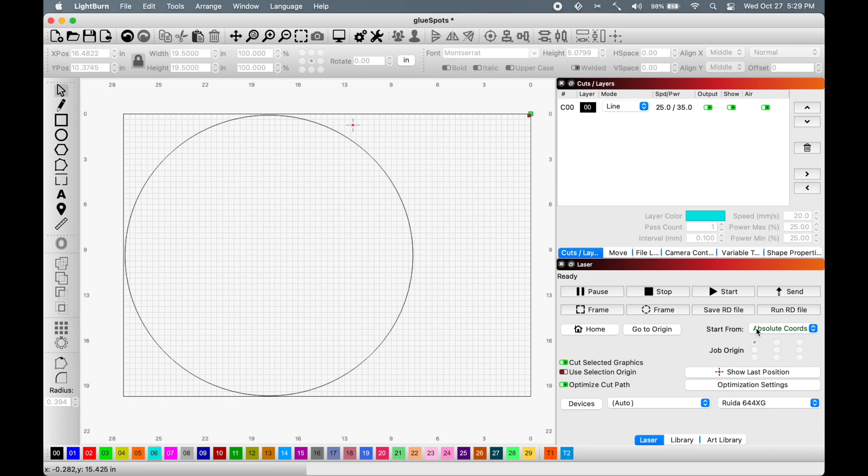Second, do not move your material after you cut it. If you need to check and find out if something is cut all the way through, be very careful checking that you're not moving it around. If you do move it, you're likely going to have to realign it one way or another, and that's not going to be very easy.

Okay, so I've just made this cut, and I found a small knot that didn't cut. So first I'm going to need to find this position in Lightburn.

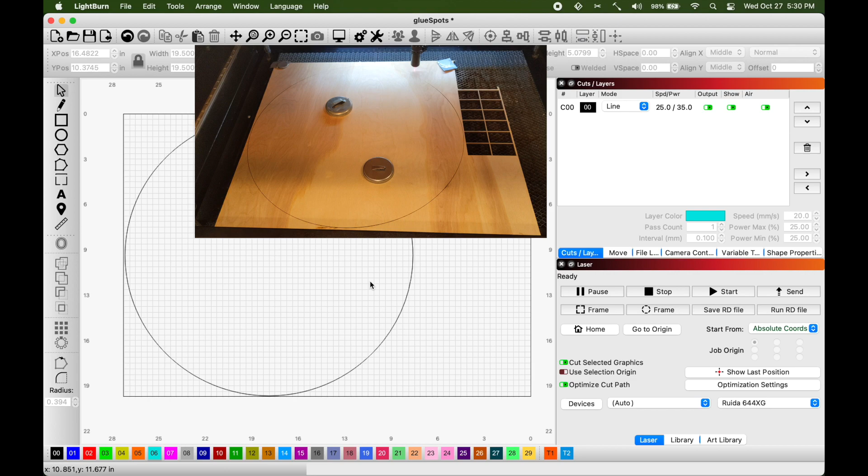So there's a couple of ways to do that. One way is to use the jog arrows on my laser machine. Just move the head over to that position. And then right here in Lightburn, in the move panel, I'm just going to click the get position button, and that is going to show me where the laser head is located. And that right now is just about the center of my glue spot.

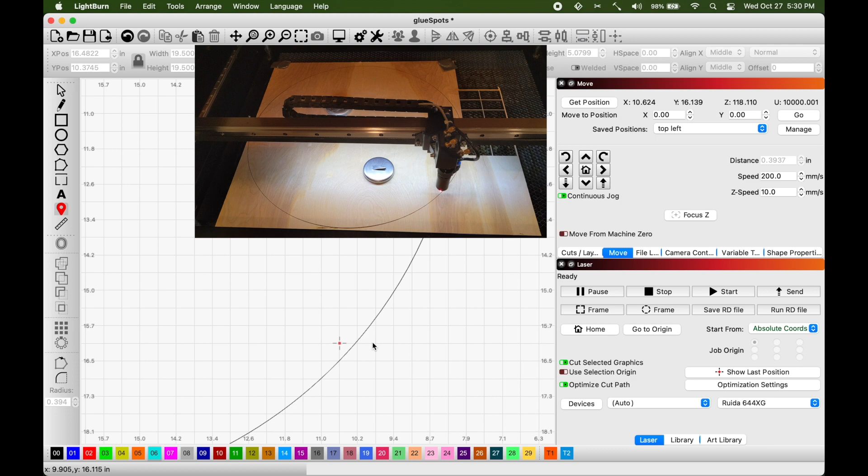Another way that you can do that is to click this position tool right here in the Lightburn toolbar and click around using it and move your laser head to get in the right position. So I'm going to stick it right there, and I can see that that is over. It's a little hard to see on camera, but that's over the position that I need it to be. So now I've got the camera moved a little closer, and I found the right spot that I want to recut.

Next I'm going to draw a cutout shape around it. So a rectangle or a circle works fine, and I'm just going to draw this shape around the area, and then I can frame it to see how big of an area it covers. That looks pretty good.

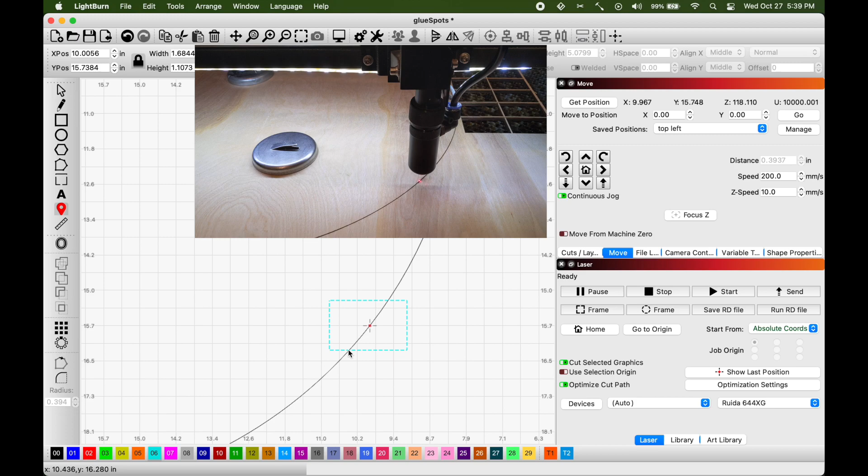I can also use this position tool again and just click. This is where my cut would start. This is where it would end. And I'm happy with that size.

So next I'm going to cut my design down to just this section inside the rectangle. To do that, I'm going to hit escape to go from the rectangle tool back to the selection tool, or I can also just click up here on the cursor. Then I'm going to select my design shape first. The order matters here. And then I'm going to hold Shift and click on my cutout shape.

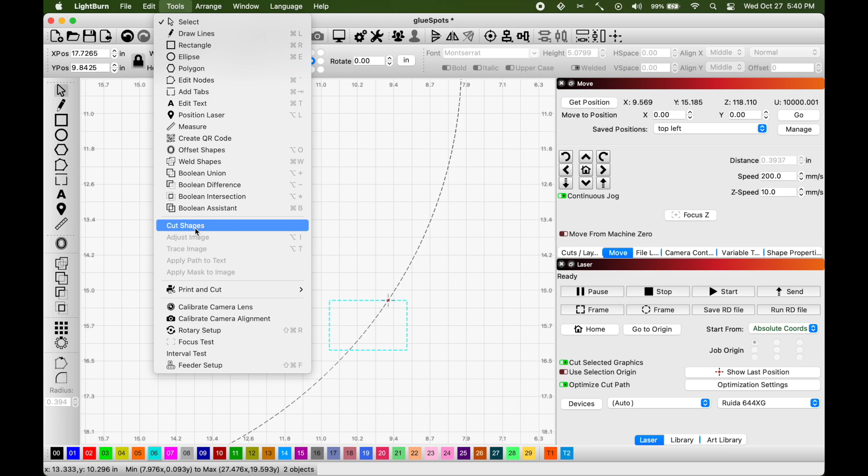Once I've selected those in that order, I can come up here to Tools and select Cut Shapes. With Cut Shapes clicked, the rectangle is going to disappear, and you can see now that my circle has been broken into two pieces.

Now notice that I've got Cut Selected Graphics selected here. Without that selected, the Frame button is going to frame everything. I don't want to do that. Cut Selected Graphics will cause it to frame just what's about to be cut. And if I hit the frame, I can see it's just going to cut my little piece of the curve right there.

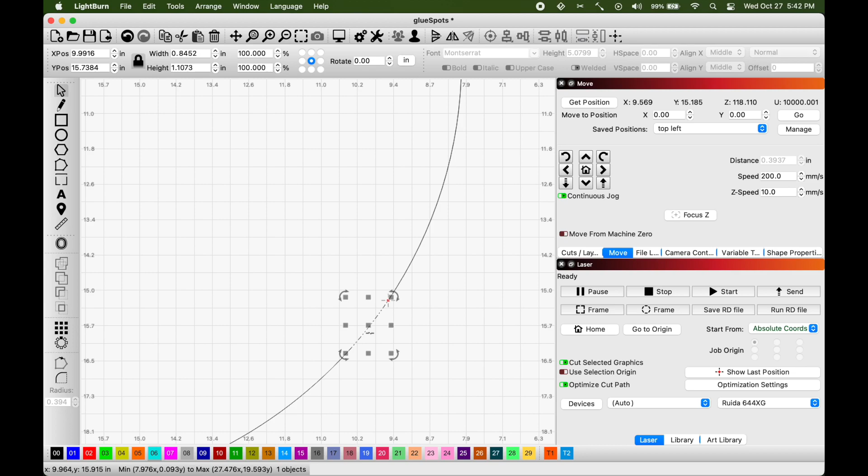Now, side note, if the new cutout shape that you get is bigger than what you had drawn with the rectangle, in other words, if this shape doesn't match the rectangle that you had drawn before, watch the end of the video. There's currently a Lightburn bug that is about to be fixed shortly, and I'll show you a workaround for it if you run into that bug. But by the next version of Lightburn, the bug's already going to be gone, so I'm just going to leave that for the very end of the video.

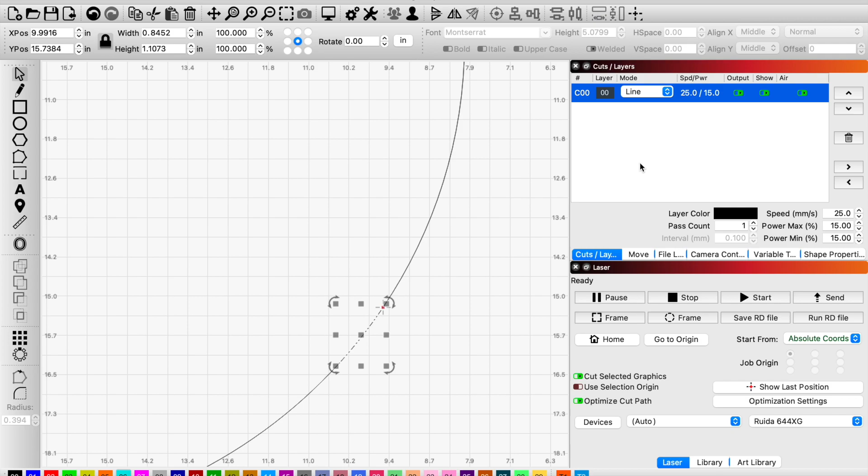So now that I've trimmed my design to just the piece that I want cut, I'm ready to cut. I'm going to double check my cut settings, make sure they're what I want to use. Because it's so easy to just cut and recut, I can drop the power if I want to and run it multiple times. Also, when my cut starts and ends, it's going to go back to the origin, so I can hit the origin button on my machine and tell it where I want it to go back to when the cut is finished. That'll save me some time if I'm cutting the same little segment multiple times. So I've double checked my settings, double checked my focus, and I'm gonna fire up the laser and make the cut.

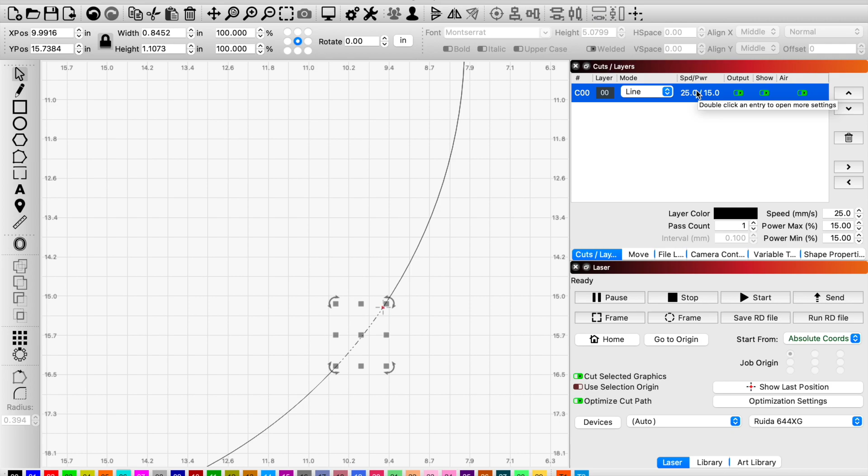Okay, you can see it only took a second. I did see some cutting going on in the middle there. I'm gonna run it one more time and take a look at it.

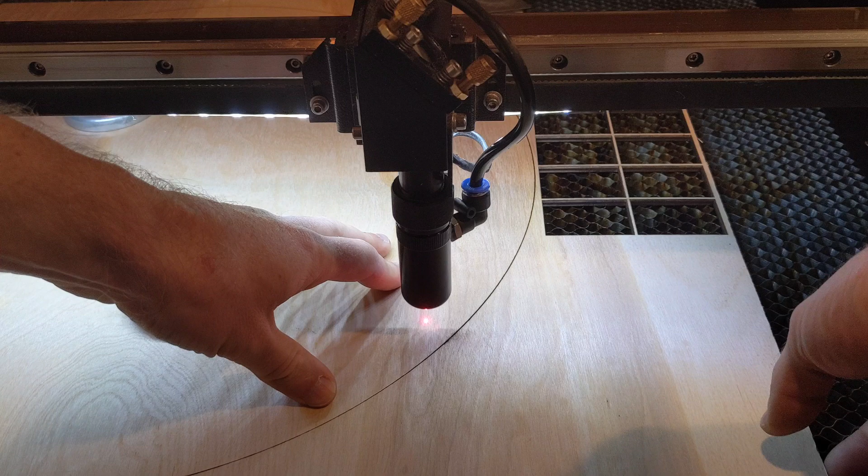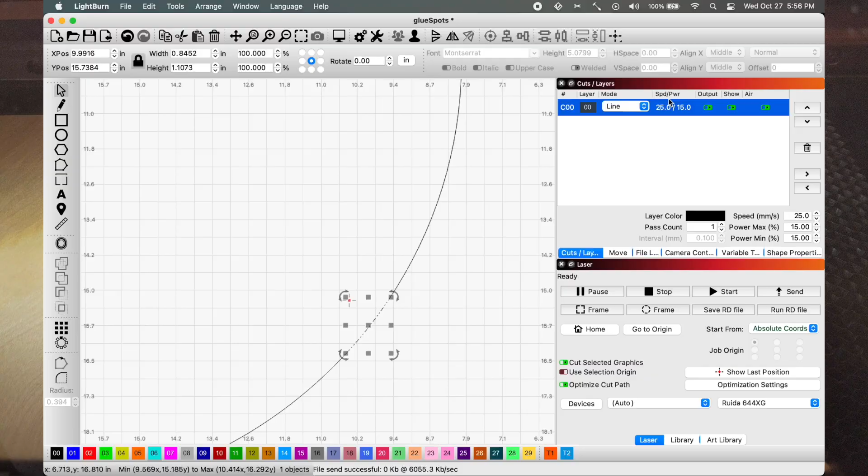When I check this, I still want to be careful not to move it in case it's not cut all the way through just yet. It feels like it's still not ready yet, still not quite cut through. I'm going to change my settings back to my regular cut settings for this material and run the cut one more time.

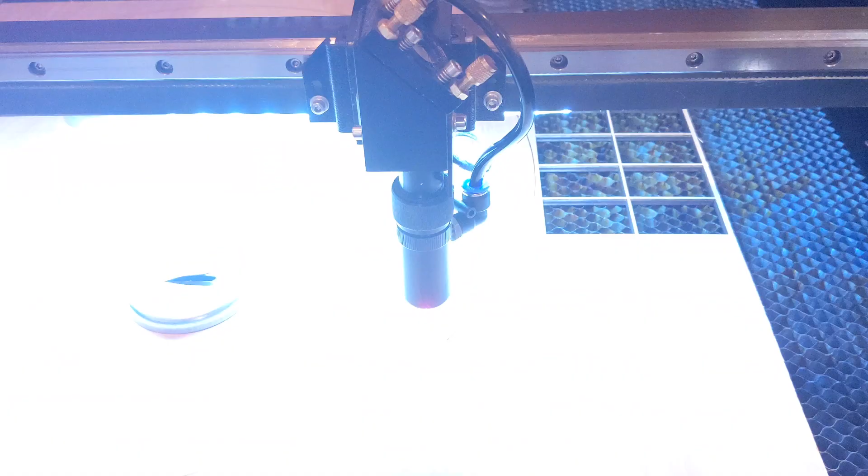Check it again. Now sometimes these knots and glue spots can be pretty stubborn, so you can imagine I've run this multiple times now. Think how much time I'm saving each time I run this. Doesn't hurt anything, and you saw it drop there just now, so now I know that it's really finished cutting. At this point, I just want to make sure I've finished cutting through everything. If I had more glue spots, I might take care of those, but since this was only just the one glue spot, I'm just going to check and make sure everything is loose. Now that I see that it is, I'm going to pull my backer piece off.

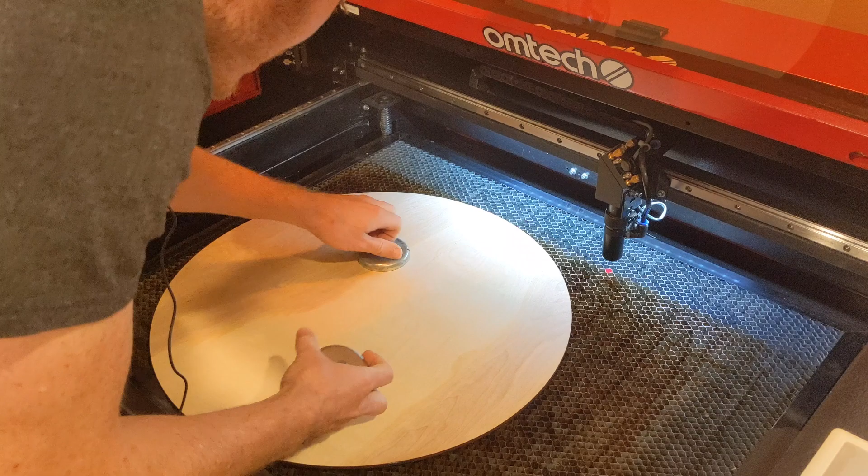Sometimes I have the backer held down with magnets. In this case, I just held down the middle piece because that was what was accessible. And there is my glue spot all cut through. If I want that to be pretty, I'll sand it down a little, but there it is, ready for the next step on my sign.

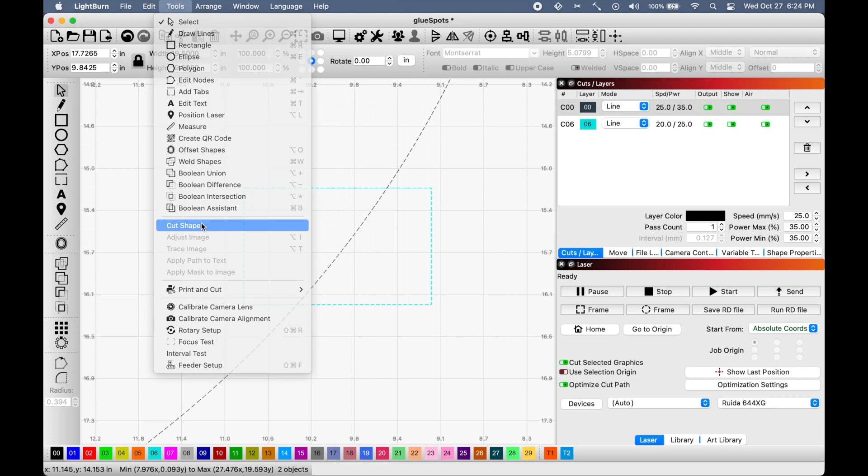So if you're using LightBurn version 1.0.4 or earlier, you might run into a bug with the Cut Shapes tool. Let me show you what that looks like. So I select my design shape and then my cutout shape, run Cut Shapes, and you can see here that the shape it just cut is much bigger than what it was supposed to be. There's the rectangle, there's what it cut.

This happens in current versions of LightBurn when the shape you're cutting through has no nodes in it. This is actually a bug that I found and reported to the LightBurn developers, and they just got back to me while making this video and said it's fixed and will be in the next version. So you should be able to get around it just by updating to 1.0.5 or later once they're available.

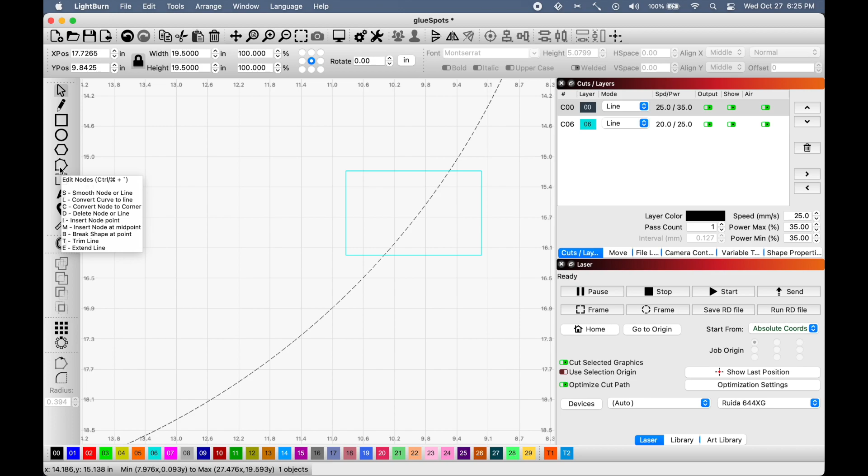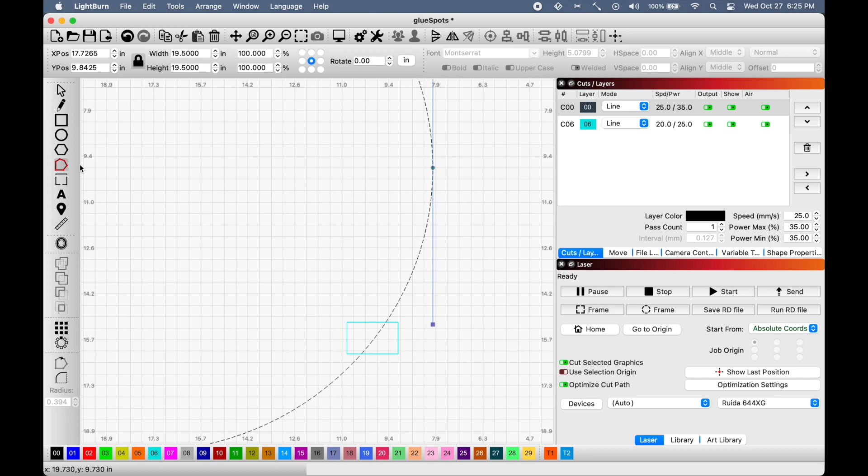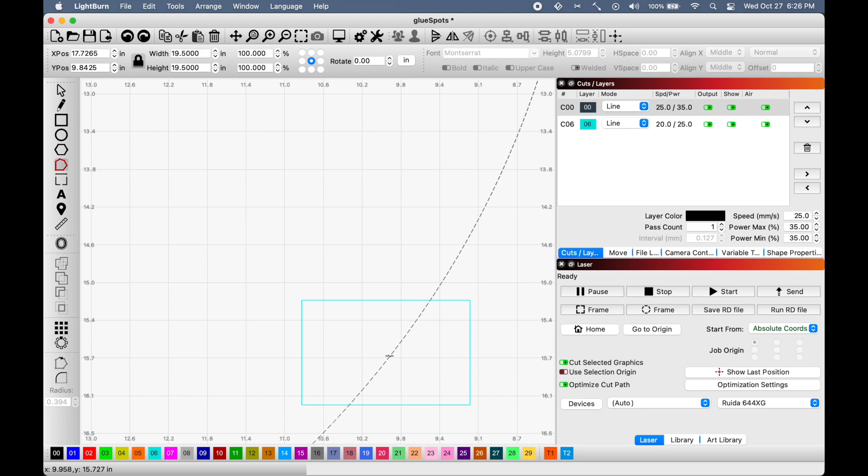If they're not, or for whatever reason you can't upgrade, let me show you how to work around it. Select your shape, click Edit Nodes, and you can see that this circle doesn't show any nodes to edit. But if you convert it to a path, then it will add nodes. And then you can simply hover over the part of the shape you want to insert the node in and press the I key, and that will insert a node right there.

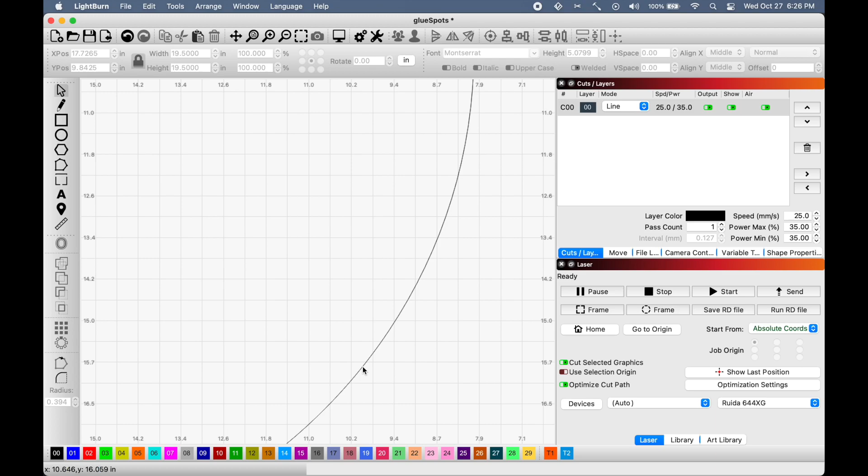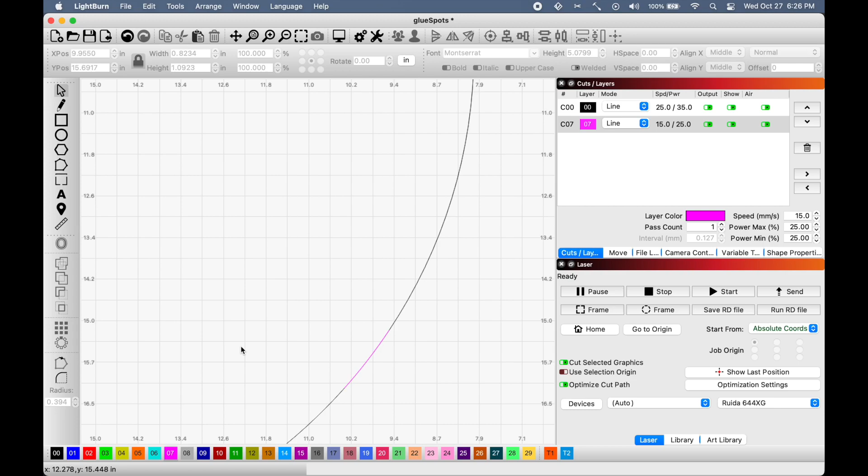Once you've inserted a node there, if you go back to the normal selection mode, select, shift, select, cut shapes, your shape will be properly cut. So again, if you have 1.0.5 or later, as long as they're able to get the fix in, you should be able to work around this in that way. Otherwise, there's a workaround for you.